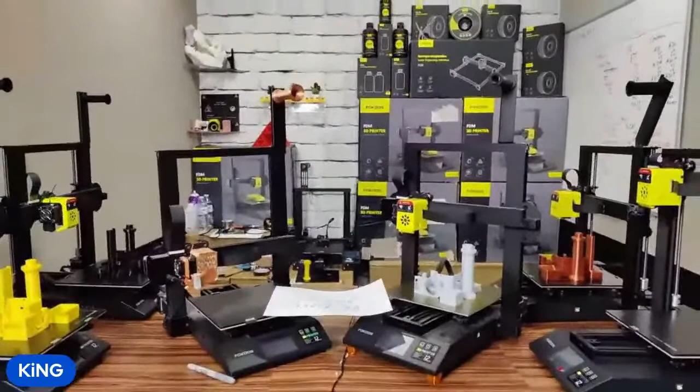That's 1 out of 10 now, come on. It's changing. Wow, that's really off, okay. Over here to the right. There's too many notches there. Doesn't want to see them. It's big.

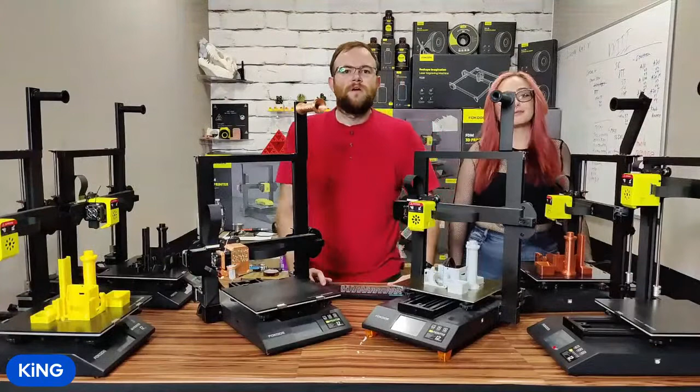You guys can't see me because of all the stuff. Yeah, we got a lot of Odins up here. I have a problem with buying things, and $100 Odins is not something that I can pass up. So we have, yeah, we're simulcasting.

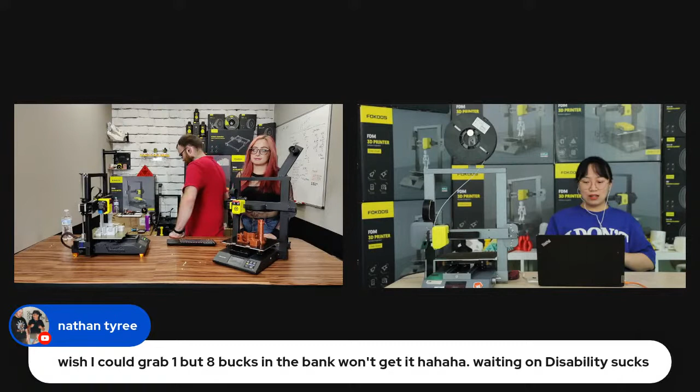And I just printed a skull on this Odin Smart, but it finished.

Let me switch the camera over to full screen on you. Sorry, I'm still working on my setup here, let me see, I don't know how to main screen you, that's what I'm trying to figure out. Do the 2x2. Well the 2x2 is like, it's not zoomed in enough.

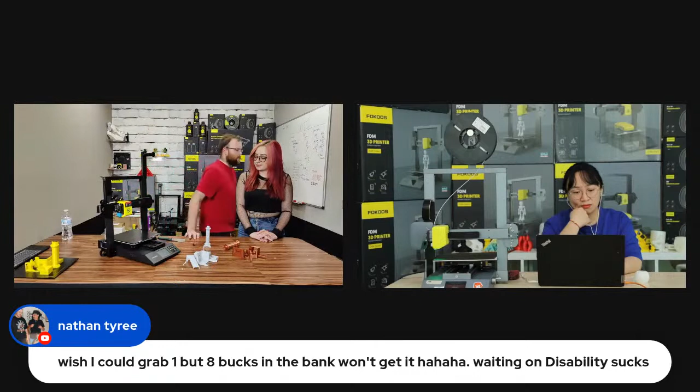Back to the mic waiting game, you guys know how it goes.

Hi Amanda, hey, nice to see you, nice to see you too. Yeah, first time to see you here. Yeah, I'll hopefully be here a bit more often.

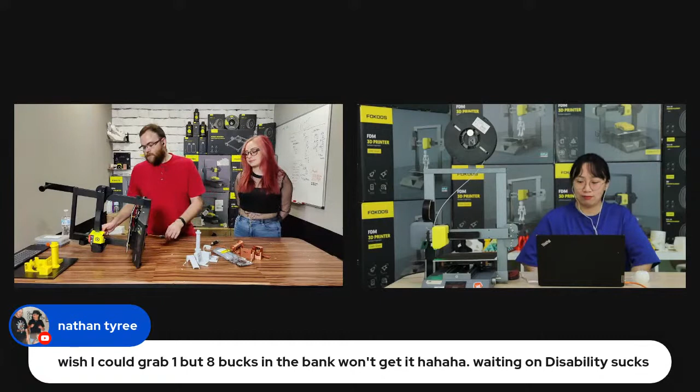Somebody's asking if Phillips screws will work for the BL Touch shroud and everything. Yeah, it depends. As long as they're metric M3, it doesn't really matter too much what the head is. I definitely prefer hex for many reasons, though. I guess I could change the camera to the overhead. That might be a little bit helpful.

Click buttons on the other side, annoyingly enough. Okay.

Is there a file we can print to hold the Odin while folded? So I was thinking, there might be something we can do. It might have to use the front screw holes or something. I'm not 100% sure, I haven't really thought of it, but it's definitely something we can look into.

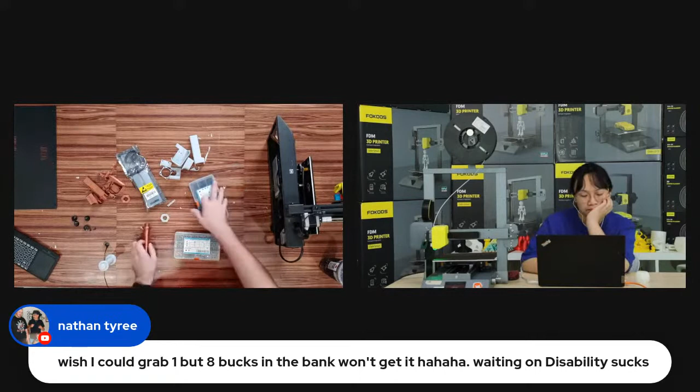So let's see, Home Depot for metric screws. Yeah, you can go to Home Depot if you're really desperate. But I would say, let me put these on camera really quick. The brand is IXL, IEXCELL, and they're like 700, 800-something screw kits, and they come with M3 sizes, 6mm, 8mm, 10, 12, 16, 20, 25, 30, and just about the same on this one here. I buy the black and the stainless just because of different themes. This one's going to be marble and copper, so I'm probably going to go with the black screws because it's going to be prettier, you know.

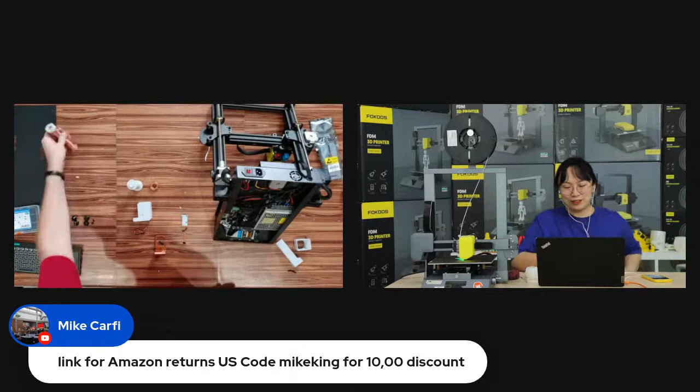It's gonna have literally everything. Then the winner will be very lucky. I like to think so. Yeah, good luck, guys. And how will us select the winner?

I'm gonna go slice a file at some point and then try to keep it at like a 15-20 minute print, and then we'll do the weight system to see if it'll work that way.

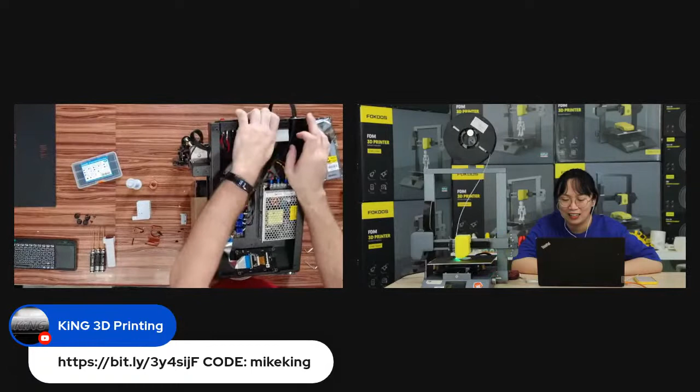Makes it a little bit quieter too. That's what the old part used to have. It used to have like a little spacer that would go in here and make the fan a little bit farther away from the back case. I need to update this and give the 4020 a little bit more love.

It doesn't matter if you do a BL Touch or a CR Touch, but if you're going to spend the money on a legitimate BL Touch instead of the 3D Touch, I would say just go for the CR Touch because it's like $5 more.

So the next thing we're going to do—by the way, I forgot to mention orientations of fan blowing and everything. I'll touch on that when I get this fan off, because we're actually going to take this fan and turn it away. It's currently set to blow at the motherboard, which is fantastic, in that it's blowing directly on where the drivers are. Most people—I mean, Creality—will have a fan over here or something that's just blowing air around the case rather than hitting the motherboard directly.

So same firmware for the BL Touch, CR Touch, 3D Touch, all that. The only time it makes a difference is if you're trying to install that... what is that thing called, like the Touch Me probe or whatever. It's so inappropriate sounding, please, I'm sorry if that's wrong.

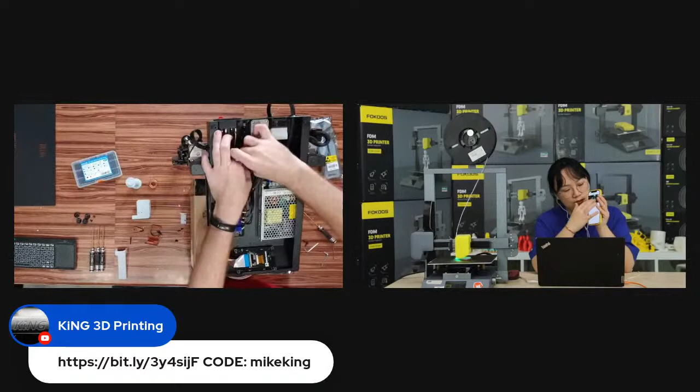So my firmware doesn't currently support the Wi-Fi. I'm trying to—I think I finally found it in stock for like $20 on Amazon. I'm going to try to pick one up and get that going for you guys too, because it's supported by Marlin. This isn't the only board that supports that Wi-Fi. The SKR boards support Wi-Fi too, and a lot of the MKS boards do.

Yeah, she's currently printing on the Odin Smart. So that's it, yes. Yep, and we're also making a time-lapse video of this printing. Excellent, so you'll be able to check out that video later. You can see the print she's actually printing now. I just printed it before, and I can show you the video.

Okay, so the fans—you'll have two sides. One side you can literally grab the blades and touch them and move them, and the other side has these supports and actually has the motor.

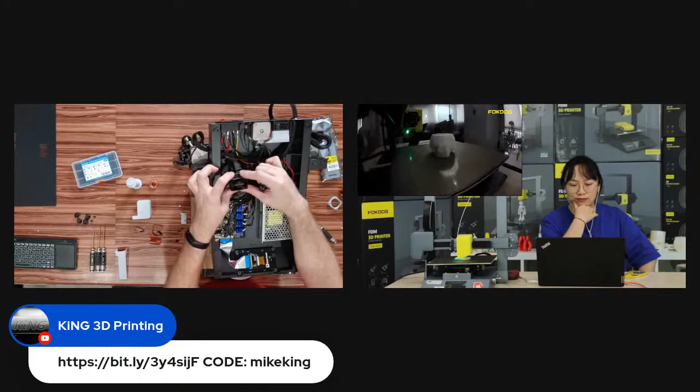It's not 100% of the time, but like 99.998% of the time, fans will blow towards this motor mount. So if you're holding it in your hand and you can see the motor mount, the fan would be blowing toward you. So if you face it towards the back of the case, it'd blow that way. If you face this motor towards the front, like it was, it'll blow towards the motherboard.

So what we're going to do is take this shroud—or this ducting rather, it's a duct shroud, I don't know—and we're going to install this on the fan here. What it's going to do is pull the cold air across the drivers and exhaust it out the back of the case.

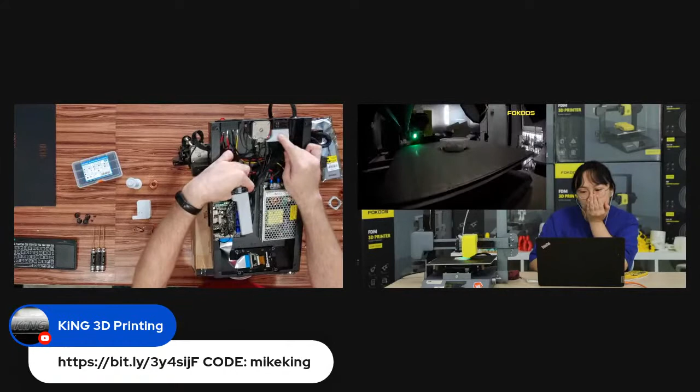The Odin is set up to draw air in across the power supply because it has a passive power supply without any extra fan on it. So it's going to pull air across the power supply, suck it in across the drivers, and then exhaust it towards the back of the case, where it's actually going to get sucked up by this exhaust fan and shoot it out. That's why I made this ducting the way that I did, so it can capture a little bit more of that air.

So let's go ahead and get this thing installed. This is M3 by 20 millimeter or 25. Sorry, let me go grab the 20 millimeter because we don't actually have to go through the fan here.

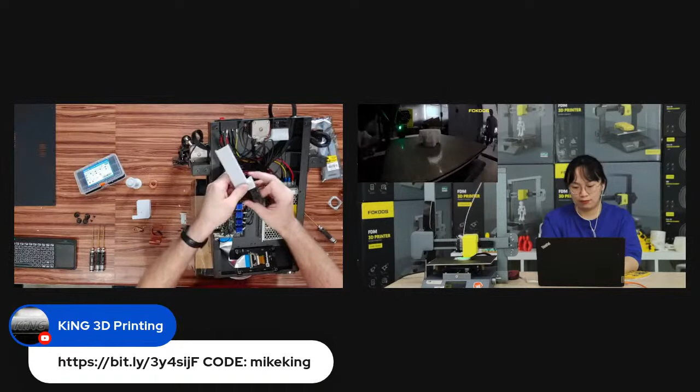So far you need two 25 millimeter and two 20 millimeter screws. This is like me making a list for myself later, so I think I have the sizes on the Thingiverse page. I think. But generally, if you pick up one of these screw kits, I forgot to mention, they're like 14, 15 bucks or something like that for the screw kit. If you go to Ace Hardware or Home Depot and look at the pricing on stuff there, it's not going to be that bad, but it adds up really fast if you're trying to outfit more than one printer or if you need a couple different screw sizes.

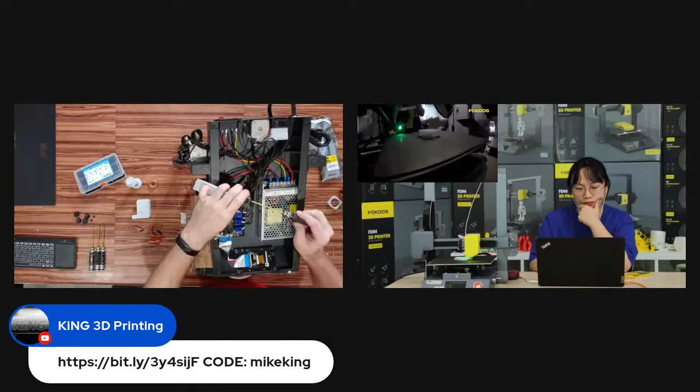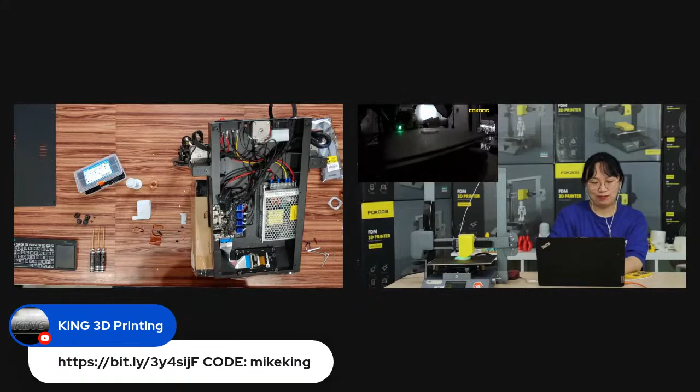Sorry, I went and grabbed the 25 millimeter screws anyway, just because it gets a little bit more bite and it makes me feel better. So I would grab four 25 millimeter screws instead of the 20s, just to clarify.

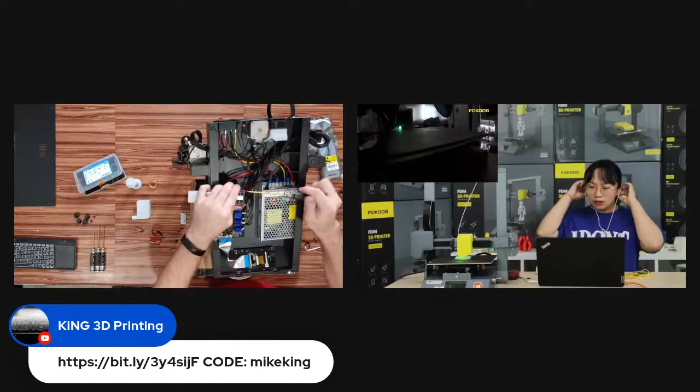Oh no, did it die? Don't do this to me. What was that? Okay, so I'm gonna pin. Actually, I don't want to depin that. Yeah, that's fine, it's the same one.

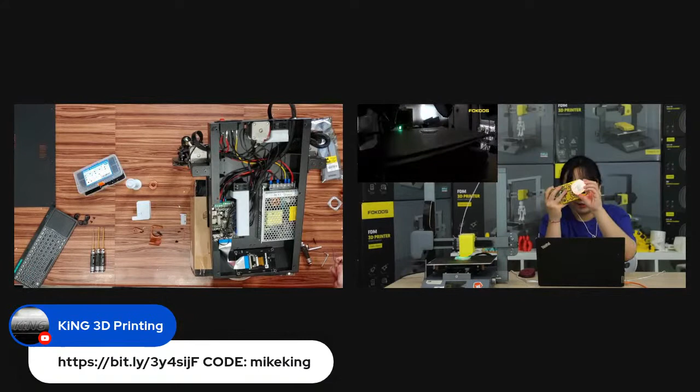You can see the scar there on my hand. May as well buy one. Look, man, it's worth a shot. It's like, you know, you're not going to win the car if you don't try. Not that I'm giving away a car, but I mean, I would definitely download a car and then 3D print it for you, though.

Yeah, the screen doesn't work on Klipper. I know that some printers have it working and some don't. I just don't know which it does, and I don't want to be that guy who gets somebody's hopes up. So...

Oh, I grabbed the long screw then. Oh, I need it, right? Okay.

Sorry if I'm delirious from the cold medicine.

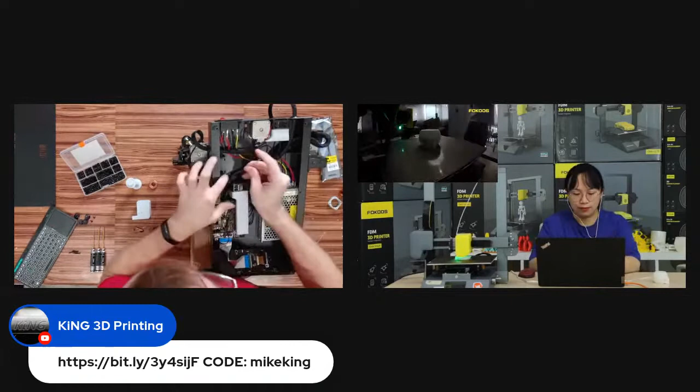Okay, so this gets the two screws on the bottom. Since you're flipping the fan around, you're going to need new screws again — another set of M3 by 25, because it doesn't have the recesses on the other side of the fan for the screws. Unfortunate circumstance there, but at least they're all the same size so far. So if you go to Home Depot or Ace or somewhere like that, it'll be very easy to pick up the sizes you'll need for the bottom.

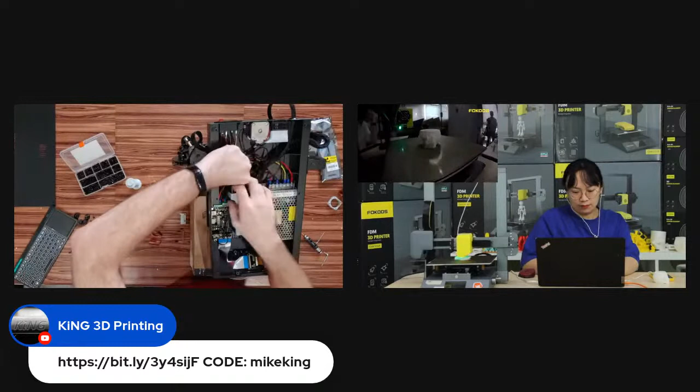Once we get this installed, we're done with the shrouds on the bottom. So we're going to start the process on the BL Touch, or 3D Touch, the Touch Probe install.

And I wouldn't download a car. Yeah, that's what I was referencing — those old anti-piracy TV ads where they'd try to shame you and guilt you into not being a pirate. I don't think they realized that as millennials, we can't afford things, and we would definitely download like a house, property, an island to put it all on. Yeah, we would definitely do that. We don't care.

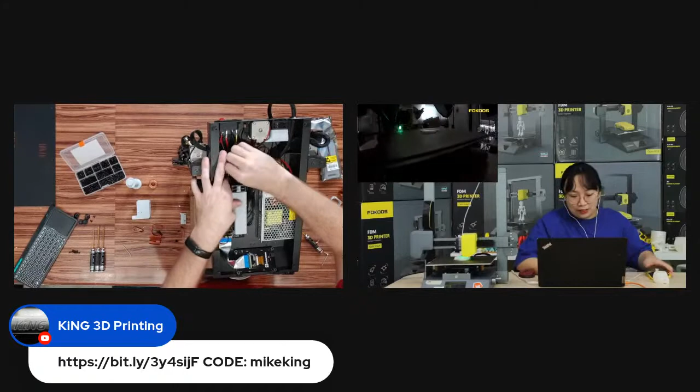So I'm kind of going blind here with you guys. I'm going to try to zoom in once I start the wiring part of this, because this is all just filler right now, since it just takes forever. Yeah Barry, I was literally like, oh yeah, you really can't see anything for the wiring. But we're on the same step here — we're walking together.

Bring it here. Yeah. Okay. Okay, fan's nice and snug.

Sorry, I'm rehydrating so I can continue talking. My bad.

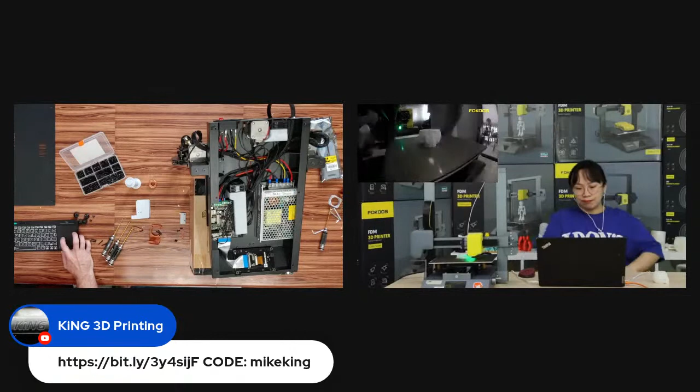Okay. All right, so that's where we're at now. I think if that looks good, we can proceed. Try to zoom in a little bit more, just get more of the board in the frame here.

Forgetting things, okay. I don't think I brought a blade over here, unfortunately. Okay, we have archaic ways to do this. Or I can have my assistant assist — that works too.

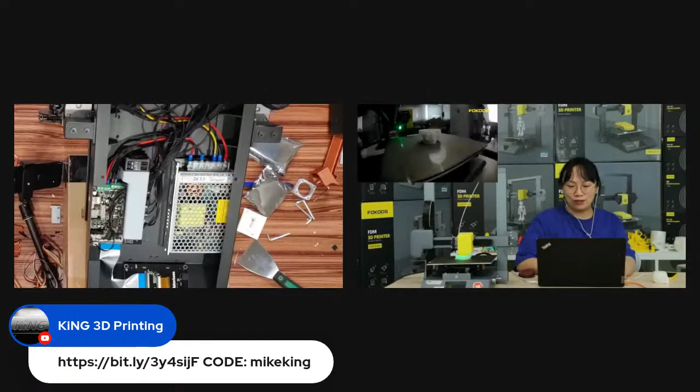Okie dokie, so it just became really quiet in my headset. It's so lonely now, all right.

So we're going to click down here on the comments. All right, so hand cam, that's where we're at. Let's get this switched over here.

I'm gonna do my best to not shaky cam this for you guys. So on the board, whoa, you guys enjoying the ride? I am, all right.

Do we have focus? Is that a thing here? Whoa, goodness. Okay, there we go. Perfect. So on the board, let's take off manual focus here. It's giving me an aneurysm.

Okay, so on the board we have this section here. There's 4 pins to the left, these 3, and then there's 4 more pins here. We're going to ignore these 4, and we're going to worry about the ones that say BL Touch. This is the same for BL Touch, 3D Touch, CR Touch. It's all the same, just make sure that ground, 5 volt, and signal are all there.

So this is where we're going to take our 3-pin connector out of our double—sorry, I'm not coordinated enough for this right now. So we're going to take our 3-pin connector out of our double, after we force it to focus again. Come on, man. Look, all right, continuous focus. I don't care anymore, you're about to get fired.

Okay, thank you. So ground is going to be our brown, 5 volts is red, and... LG is definitely fired, 100%. We're going to go manual, and we're just going to figure this out.

Okay, so you have ground, 5 volts, signal: brown, red, yellow. Depending on which probe you buy, it might change a little bit, so check the diagram on the back. Just check your colors, make sure they're okay. It's really, really hard to damage components that are 5 volts with this stuff, but I guess it can happen. It has happened before to some people, so just be careful.

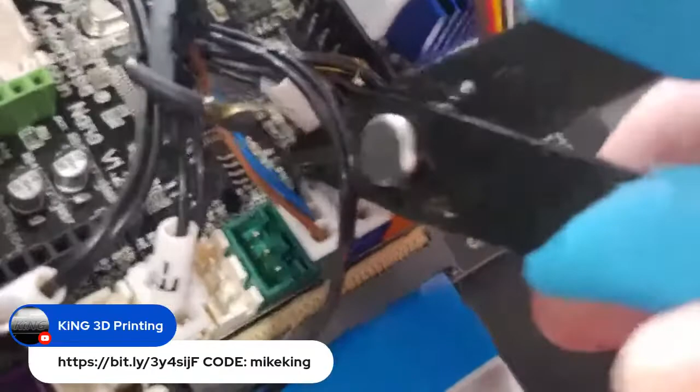Again, doing this on camera, I'm trying to view this through the camera for some reason, just a habit. All right, I'm gonna brute force this because I'm lazy and I trust myself, but you don't have to. But you are removing this switch entirely, so it doesn't really matter if you butcher its connector a little bit. Just make sure if you start prying up and you notice the green socket starts coming up, stop, because it's kind of really annoying to put back in. Until you get really good at it, but don't make yourself get really good at it unless you have to.

So then the way that I have remembered this on my Ender that I have hooked up with ABL already is you normally will have a white and black wire.

Is there no audio for real? Oh, one second, can I get a confirmation on audio if anybody can do that for me? Okay, you can hear me. Let's see, I'm going to increase the gain a little bit.

Yeah, that's a little... oh, goodness, I hate touchpads so much. Okay, stand by. Jeez.

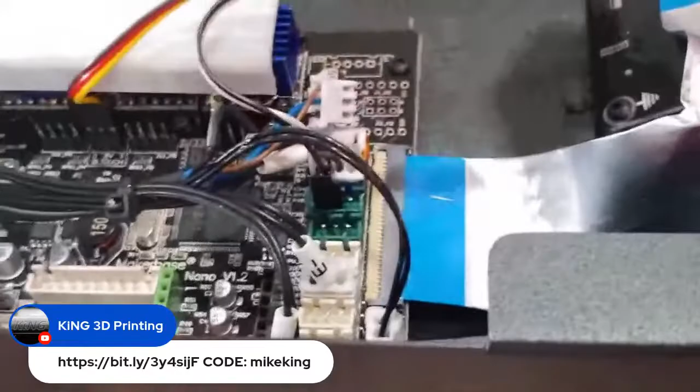Whoa, sorry, lost track of the feed again. So yeah, just plugging this into here. You can hot glue this if you want. I'll probably do that later after the stream, come back and do a little bit more cleanup on the wiring and stuff. So this is the wiring for the BL Touch, CR Touch, 3D Touch, etc.

You're doing ground, voltage, signal, and then I forget what these correlate to, but it's going to be your white wire and your black wire. That's just so you can compare your wiring with mine to make sure it's the right color. From right to left, it'll be basically the same pattern. So your ground, power, signal, and then the white and black are what's flipped - white then black instead of black and white.

So we're going to switch it back over here to the sky camera that's super zoomed.

Okay, so we have these connected. The only thing that we need to do now is the entire rest of everything. Isn't too bad.

This is the motor cover that we have to take off, the left side one. This is the one where the ribbon cables go through. I would say preemptively go ahead and unplug the ribbon cable. It's got a little tab here, I'll try to move this out of the way so you can see. It has a little tab on the ribbon cable - don't just grab the cable and rip it out. Grab this tab and then pull straight on it, and it'll come right out.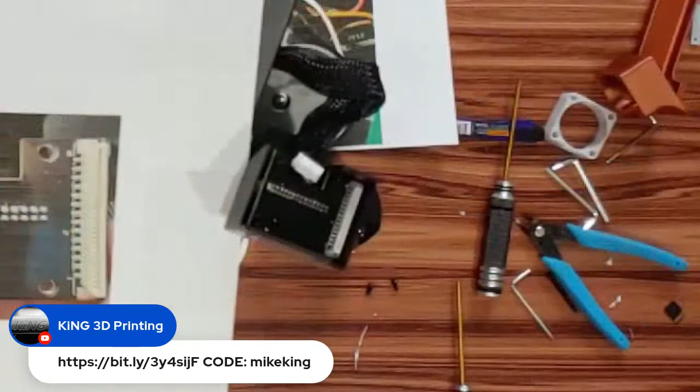All right, it's about as big as I can make it, I think, without losing too much quality or getting too shaky. Still just debridging these two pins I put together.

There's two types of people in this world - there's the people who use flux and there's the people who don't. I'll use flux for SMD and other stuff, like I'm going to do a silent board upgrade video where you'll see me use a ton of flux. But for something like this, my Kester - what is this, the 6344, I don't know, it's really smudged, I forget - it's a big iron for the job. I have a smaller tipped one, but honestly I'm really, really comfortable with this solder tip. It's really pretty bearable once you get used to it.

So before we solder the wires on there, I just wanted to get that prepped. To make this as neat and pretty as possible, we're going to be feeding the cable. Let me pan the camera a little bit here.

This touchpad is absolutely awful to use single-handedly. It doesn't help that it seems like this keyboard just randomly disconnects sometimes too.

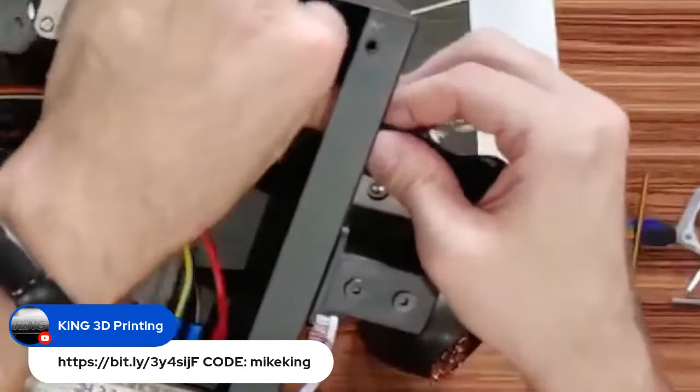All right, so we need this to be only a little bit too long because we want to leave ourselves a little bit of length, but we don't want a giant mess coiled up in here. So I'm going to trim about maybe a third of the cable off.

Hey, what's up, Eric? Thanks for stopping by. This is like halfway through the process you're going to be going through soon, I'm sure.

So we just need to break this ribbon cable up into its individual wires.

If you have wire strippers, this is the time to use them. I don't, so I'm doing this caveman style. You only need the top tiniest bit of these wires stripped, because you're only going from the tip of the wire to the contact pad, not trying to bridge a bunch of contacts. I just clipped it off, but I don't want it to be ugly, so I'm going to clip it and restart this process. This is why you use wire strippers.

So you're going to bring your wires over to the top. We're going to do the white wire on the bottom first. This is going to get tacked right into place there. And again, we're trying to use, sorry, I just need a little bit more solder. We're trying to use the insulation to make sure that they don't ever touch. So I need to clip a little bit more off of this one.

Okay. This is much, much easier when you're able to secure the stupid board. Okay.

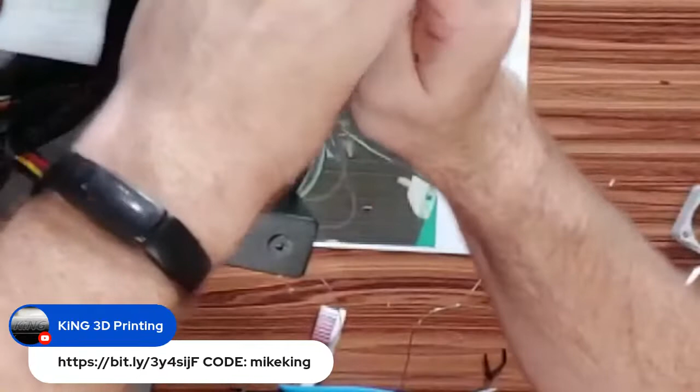Cookie. Pulled too much. Sorry, this is the part where it gets nitpicky because I want it to be pretty. So I gotta take forever to do it.

Okay, pull the wires back in a little bit. Get this clipped on. Oh yeah, I forgot the other zip tie.

Make sure you don't forget to zip tie all of your wires through the back bracket here. That's fairly important to do. Otherwise, they can kind of creep loose, which is not great. I mean, it is if you hate printing, I guess.

A little bit more mesh. Just a little bit. Tiniest bit. Okay.

Yeah, man, you know us night owls. I mean, I say that, but it's like, what, 9 on the West Coast?

How long is this going? That's a really, really good question. I would assume probably for no more than like the next hour tops. I might end the stream early and then just do the weights and announce the winners tomorrow. But we'll have to see. So if that's the case, then I'll just take everybody's guess tonight, obviously, and then we'll get that going.

Okay, so plug in our Z motor for the 100th time.

We're spamming you with all the love on Facebook. Oh, yeah? Yeah, you're getting a ton of little hearts. It's the cutest thing ever. Oh, yeah, you hear that? You guys are my adorables.

Okay, I start with the bottom screw because it's really long and easy. Get the 2 top screws put back in.

So anybody having some experiences with version 13 of the firmware? Anything good, anything bad, anything fantastic, anything not great?

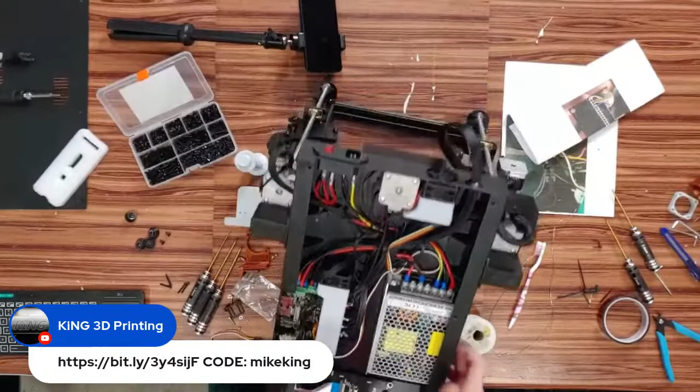I'm also going to leave the bottom off of this because again it's just kind of wasted time. I think for the shroud install we might be better with the front camera, and I'll just zoom in from there, I think.

Oh no, I was saying that the people on the West Coast have it easy because it's only like 9 o'clock something there. Like we're over here crying because it's like midnight and the stream's definitely not going to be over in the next 30 minutes, that's for sure.

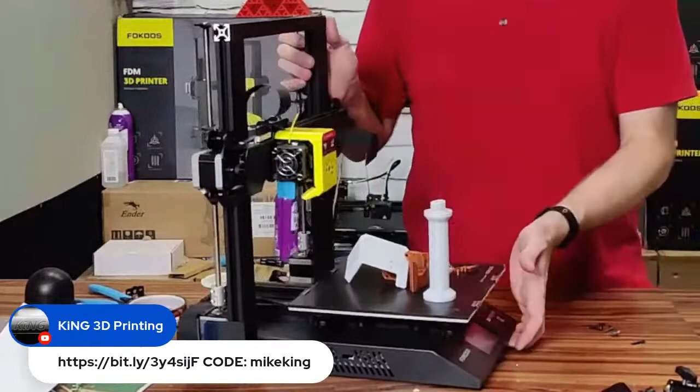All right, everybody think that that's clear enough for the shroud, probably? Just let me know, I'm going to drink a little bit of water here while I get an answer.

Okay, I think I want to zoom it in a little bit more because we're focusing basically only on the shroud. Okay, that should be a little bit nicer.

All right, so unplug your side ribbon, grab it right in the middle and just tug straight out. It's a 2mm hex to remove the stock shroud. It's going to be 3 screws - 2 on the side behind the ribbon and 1 up top. Just be careful you don't break off your ribbon cable connection on the side, just be a little wary of that. Set our stock hardware aside.

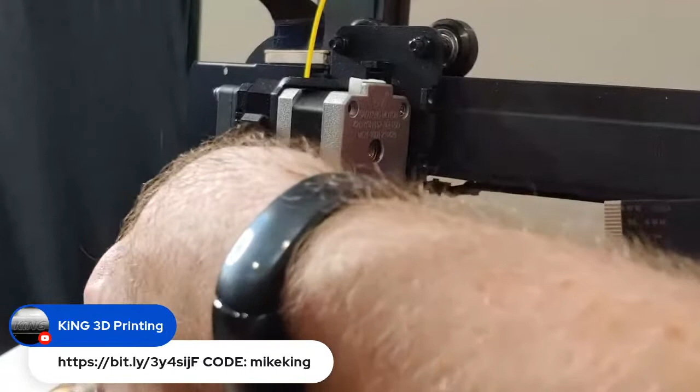So just to show what that would be like, you just take some tape and put it directly over this board, a couple layers if you want. Just make sure you don't tape over the screw holes because you're going to need to put screws back through that to mount the board on. So I'm just going to do 2 little diagonal strips here, and that's going to give it just a little bit of distance from the board. It's also going to protect the board in case for some reason it does vibrate through. I don't want to be the person who says it's going to be okay when it's not, so tape it just to be sure, but once you've taped it, it should be fine. It's going to be secured back on there.

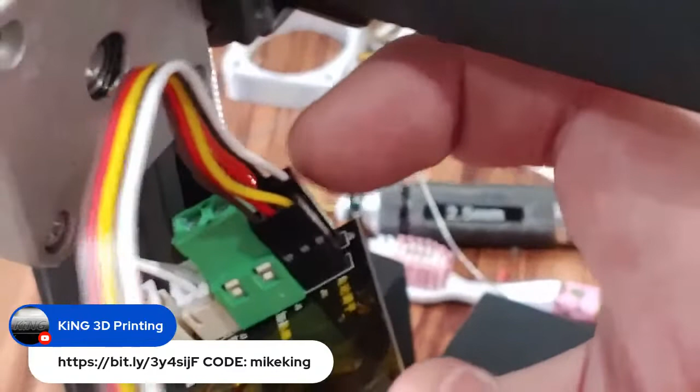All right, so on the board, this is normally in this orientation flipped up when you take it off. So when you bring it down at the bottom of the board next to the heater wires, it's already got the spots for the ABL sensor to get plugged into. So you're going to make sure the white and the yellow are on the outside of the connector, and that's how you're going to be wiring this part. And then we're going to hide the wires a little bit better here in a moment.

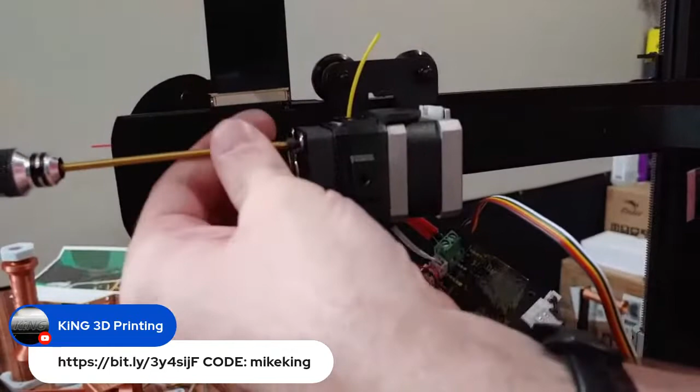Again, we're just going to let this fan kind of dangle. Make sure you don't lose the grill - it's still kind of useful to have around.

We need 25mm screws yet again, so M3 by 25. Pretty certain.

So we need the grill, we need the fan, and yet again, the direction of the fan - it blows not towards the exposed side, but it blows towards the motor mount side.

So this motor mount you should never see when it's on the hot end. This should be facing the hot end, and all you should see is the fan blades here.

Sorry to go off topic, but what is the absolute way to prevent error 7? You're going to want to replace the thermistor, and you're probably going to want to double check your heater wires. Basically, order the accessory kit and just replace the hot end with one of their pre-built hot ends.

That's going to be one of the best ways to do it. And if you want to get a little more in depth on what's going on, you can flash my firmware, and it'll tell you specifically what's wrong rather than having to Google the error codes. But I think error code 7 was hot end min temp or max temp, so it's something to do with the thermistor most likely.

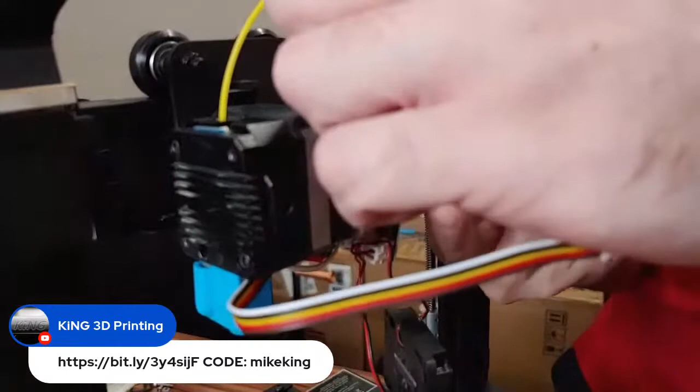What did I do differently? I'm so confused right now. That's off.

Oh right, I'm sorry. So what we're going to be doing is we need to change the screws around on the motor. Sorry, that was the important thing to remember.

I need to grab a Phillips, but this might work - we'll try this flathead really quick. So we're going to take out the motor screws from the back with a Phillips apparently, because this flathead's not going to work.

Your green screw. Oh. That's a really good one. This guy? Yes. You're welcome.

Okay dokie, so yeah, grab a proper Phillips. Take these screws out of the back of the motor.

Make sure you seat these screws all the way - you do not want your motor coming apart mid-print. And I don't recommend taking out both screws at the same time. Take out one, move it, then take out the other and move it. Plate screws - oops, super long ones.

The accessory kit is on Amazon. It comes with, I think, 2 complete hot end replacements with heaters and thermistors, everything pre-assembled. It comes with rollers, spare ribbon cables, and a flathead screwdriver for disconnecting the heater wires from the board I just removed. It comes with a couple of extra things, but it's on Amazon.

All right, that's nice and installed. Make sure your ABL wires aren't loose, fully seated, et cetera. This wire is super long, I'll show you how to deal with our super long wires here in a minute.

Need to get our hot end fans installed. It's gonna be this guy, now that our wires can reach. This way? No, this way. Just pre-installing these screws for the fan so I don't have to do this completely blind. And I dropped one anyway. Okay, there we go. Okie goes over there, this comes up here, and this whole guy is screwed in on this.

Oops, don't scratch your printer doing this process. Especially when it's not your printer anymore.

Somebody's going to win this one. So the screws that change, the screws for the back motor plate don't change - those are the stock screws, the long ones that went through the motor originally with the plate. These screws, I forgot to mention what size those were. I think those were 25... yeah, 25 millimeter for the actual ducting install.

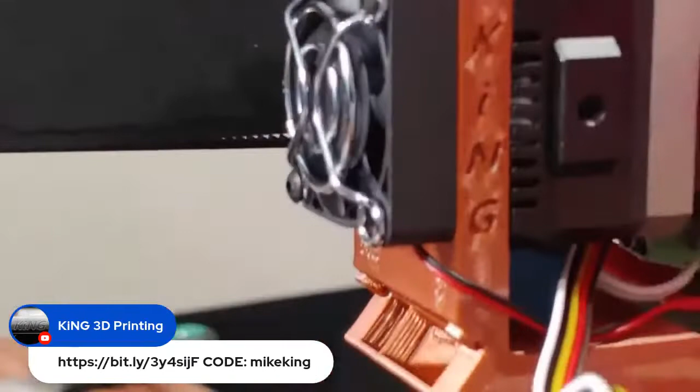So now this is where we're in like what I consider service position. Maybe I don't know if that's appropriate, but we're gonna zoom in a little bit more here. Whoa, hello. So this is service position - this is where you have access to all your wires and all of your connectors and stuff. And that's of course before the shroud goes on, which covers all of that up and makes it super pretty.

Let's see, just get everything else together here. Make sure I have all the screws I'm going to need.

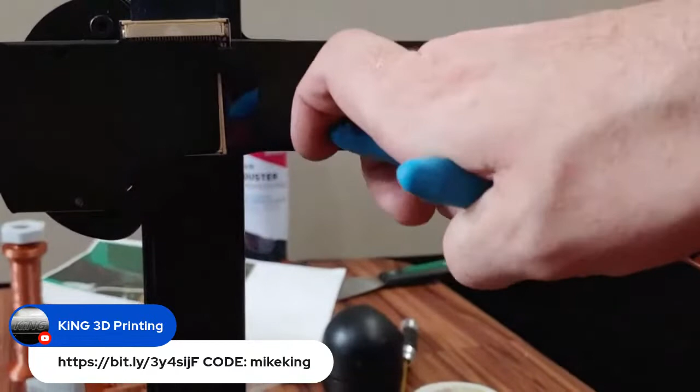So this is actually something to note - my shroud has 2 versions, one with fan tabs and one without fan tabs. And I forgot the newer printers, I think, ship without the fan tabs. So I'm just going to get in here and clip these off of the shroud. Get that away really quick. That one's hard to get to, geez.

All right, these screws. Sorry, I'll bring it back, just trying to get this all situated here. So then put these screws through.

Try to find it blind because that's the cool guy thing to do. I did find it. Look at me go.

I don't want to talk about it. It's not, I started a half an hour late. It's only been 2 hours. Oh my god, you know the Facebook thing that says we've been going for like 5 hours? Yeah, I don't know, it's like we started it and it was like 3 hours up on that. I have no idea what was up with that, but you keep it up.

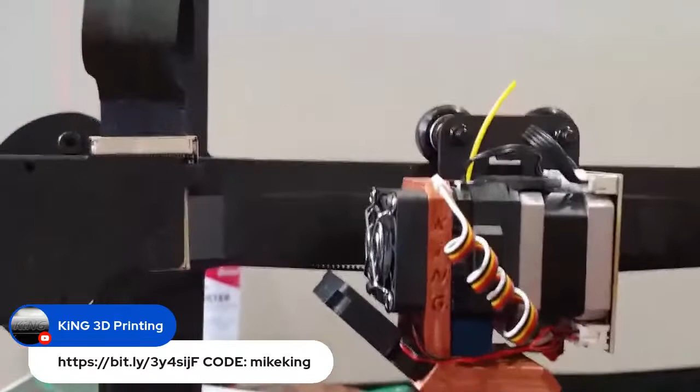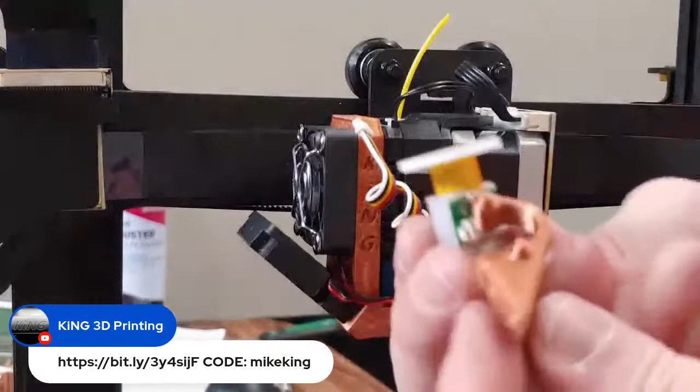All right, that should be good. We need to assemble the ABL system here. So we're going to take the ABL and the ABL bracket. Stop throwing it because it's like a wedge shape, and that's like the dumbest thing I've ever done. So it's going to say BL Touch. You take your probe with the wire side connections in the back, you slip around the little neck here of the probe, and then you're going to take M3 by 6 millimeter bolts, screws.

And then just drop, oh goodness, drop these through the probe here and screw them in from up top. I'll get this overview here in a second once I get these threaded in.

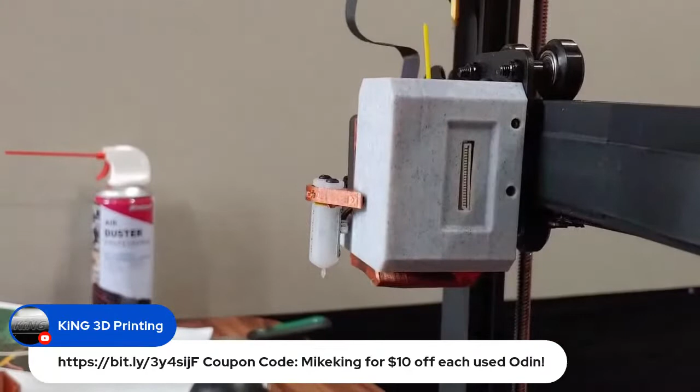Let me see if I can tuck this ribbon cable in on itself or something. Okay, that'll work. So hold the shroud in place while you tighten the screw, so it gets nice and lined up where it needs to be.

Then you're going to grab M3 by 8 millimeter screws. This is an optional step, but highly recommended. What we're installing here is the cable strain relief for the ribbon cable.

Orientation for this, it has a little nub on the top. That's going to be the top, like I just said. There's a K on it just to give you an idea of which way it goes, and because it's my brand, so.

Get this installed here, go to the bottom screw. Sorry, the ribbon cable kind of popped out like I thought it was going to. So just try to get it all lined up as straight as you can. Pull in the shroud, make sure it's all nice and tucked in. Everything should be pulled back towards the gantry, not aligned towards the front. Make sure it's all tucked back.

Tighten your side screws. You need to grab two more M3 by 6 screws. Plug in your ribbon cable first. No, it was just dirt. Okay, I was very concerned there for a second.

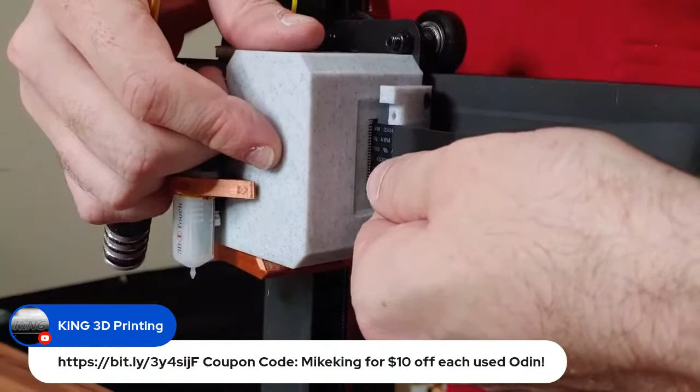People have put this on wrong many, many times. This is the other side of the cable clamp. It's got an arc on the back, and the side that touches the cable is the flat, smooth side, so you're not harming your cable with the rough side. That arch is to prevent this from bending as much when it's clamping the cable, so that way it's clamping more evenly across the entire surface.

So just got to get this guy started there. Move to the lower clamp.

Can I get some feedback? How do you guys feel about the marble and copper here? I think it's very majestic, given it's like a Greek god name, you know? Wait, is it Greek god? Right? Odin, Thor, all those people. I forget, I'm so bad at history and gods and mythologies. Anyways, look, it goes back to like Roman time things. Okay, I think it looks good, the metal and the marble. You know. Okay, so that's it.

Actually, we're done installing the shroud, the ABL, that's all done. I'm going to grab the thingy, once I remember what it's called, the spool holder. Get the spool holder reattached so we can get a print going on this guy. Well, we've got to flash the firmware and then we'll get a print going.

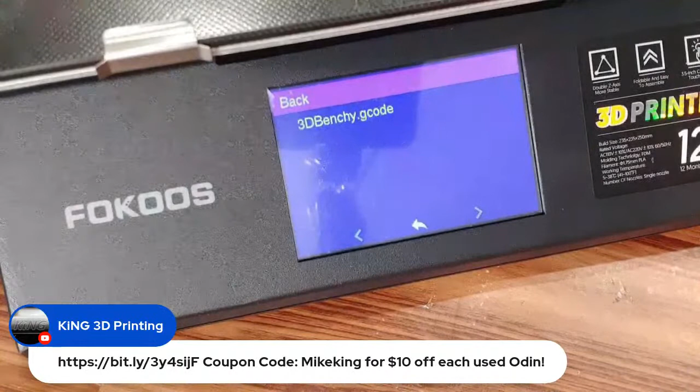As far as I'm aware, there's no real way to tell who's invited who. The giveaway should not have changed. I don't think she had posted it saying that it was invite based. I can double check on that, but pretty much every stream I've done has been guessing the print time, because I announced earlier the print time is going to be anywhere between 20 to 30 minutes for sure. But it is a Benchy to confirm, and it is under 30 minutes, should be 29 minutes according to the Cura slicer.

I'm going to give you guys a quick tour of the ABL side of things on this. Maybe I'll slide it forward so I can do this. So we're going to go in here, click on settings, motion, bed leveling, and then we're going to do bed tramming.

So it's going to go around, we're going to do the bed tramming. It's going to use the probe to make us tram instead of using some nonsense method. It's going to go around, find out which corner is too high, which one's too low.

So this is saying adjust the bed until the probe triggers. It's too low, so we're raising it. I was going to test that again. Corners within tolerance - okay, so apparently my adjustments were very, very close. We can run that again if we want to, just to verify.

But after it does that, I believe it's going to try to build a mesh. This is just by default, and it's enabled. For some reason, not everybody wants to run G29 before each print, and I'm not hating, I'm just saying. So this is just for those people who want to have their mesh built already. I do recommend doing this while the bed's heated, same with the tramming, but again, we're just doing this for time's sake.

Speaking of which, I can go ahead and start preheating. That way we don't have to wait forever.

The menu is unchanged from when the initial firmware was released. I think my first firmware was running the old UI, my next one that I had after that wasn't. So if you're familiar with regular Marlin, it's the exact same stuff, you have all of your regular menus.

So just let this finish probing. Okay, so now we're going to preheat.

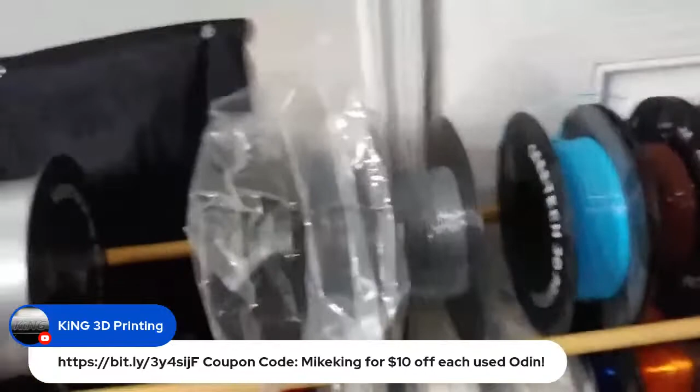Let's pick a color, let's go on a trip, let's go to my unfinished filament rack. These are fine - PLA, that's PLA. That's PETG, that's all PETG. TPU we can't do, basically anything down here, I think. Something clear? You want clear? I mean, I just have straight up clear. You can do that.

Hold on, I should have one that's already most of the way used. So I don't have clear red. I think the only things that I have that are somewhat transparent - I have fluorescent orange, fluorescent yellow, and I think fluorescent green are my transparent colors. I don't think I have anything super, super pretty. We have two for blue though, so what if aqua and blue, what if we met in the middle and used this coral blue, I think is roughly what it is, I forget what it's called. Oh, that's great. You guys want to do that color? Is that pretty enough? Is that close? That fits the blue-green-ish spectrum, it's not like green, but you know.

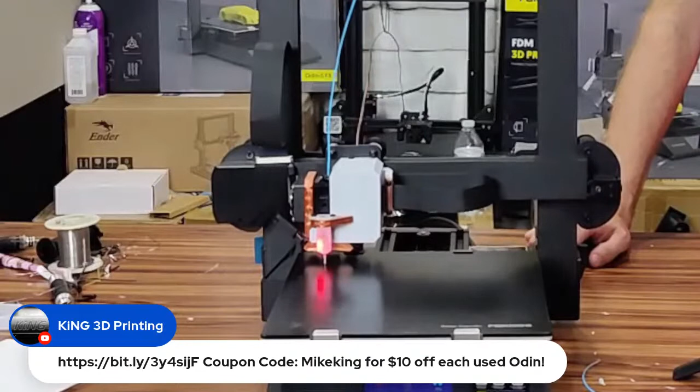And you guys are ruthless. Jeez, you guys would be perfect for The Price Is Right, like for real.

Excellent, so yeah, we're off to the races here. We get a little bit more zoomed in, I think. So far we have 33 entries for. Nice.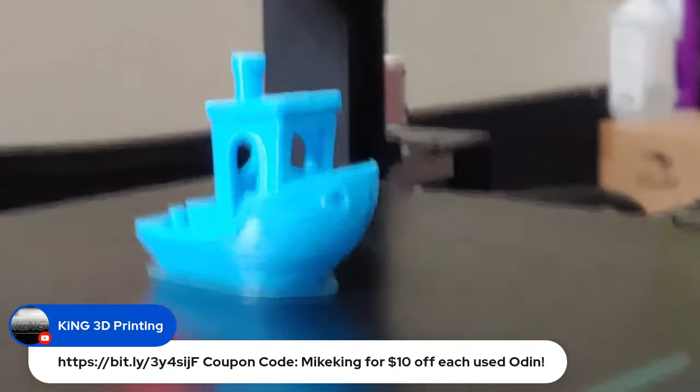Yeah, Cura lied. I have no idea how the heck, what their acceleration values are expected to be in Cura, like 10,000? Good lord.

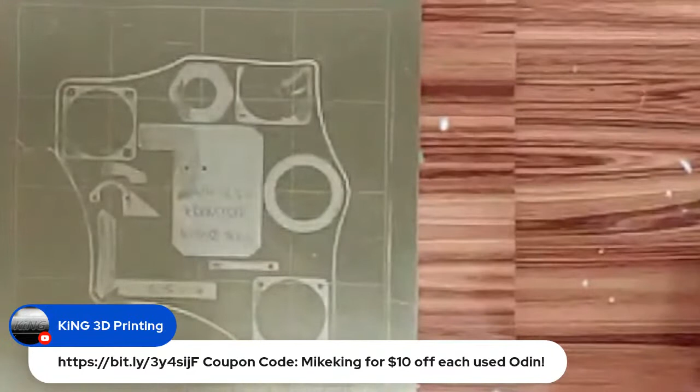Okay, let me take a look here. I'll find out... is this scale calibrated to NIST standards? It's calibrated to like...

Yeah man, congrats. I'm glad you got a chance to pick up one of those used Odins. Like I said, they're gonna be around for a little while, but who knows how long though? So don't hold off for too long. Let those normies get them and stuff, you know.

Yes, correct. And yeah, this guy only goes up to 100 grams, so I'm going to have to go find the kitchen scale to weigh the resin. I'll post the winners on that tomorrow. Unfortunately, I just checked, the scale only goes up to 100 grams. Our winners are... type it, just paste it in the chat.

You can go by the front camera, it's okay. Well, you just do it on my desktop. Oh okay, yeah, it's like there's a whole thing there. Is it fine? Does it connect, or is it just posting when you do that? That's just posting it.

Hold on a second, we're gonna do the results. This is just not good.

Oh Lord, yeah, just do it on the laptop, goodness. What? Just do it on the laptop. Oh my goodness, okay.

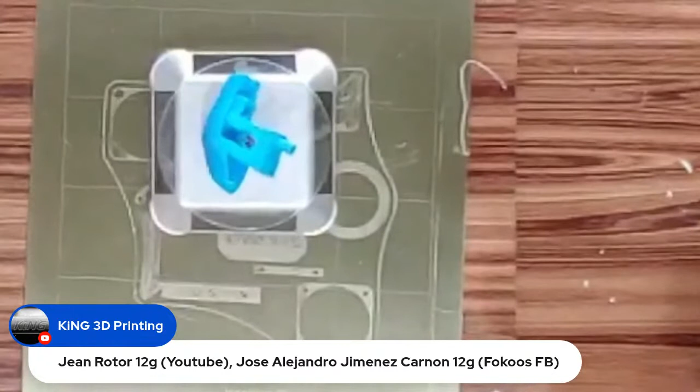You'll come say bye? Yeah, we had a lot of people that were super close, a lot of people that guessed. Get over here, 12 and 11.

So the first time I was reading the weight, it was on the bed when it was still hot, and every time I dropped it, the weight was going down. I put it down again and it was going down and down. So I cooled the scale back off, put it on, and then it was getting a consistent 12.1 or 12.09. I got 12.09 like once or twice, but I got 12.1 like 5 or 6 times.

So you're going with 12.1 for sure. But yeah, send me a PM for sure.